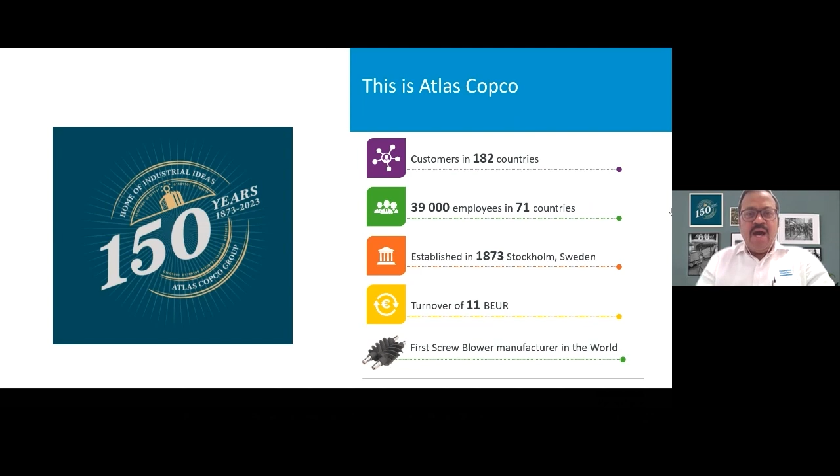And we are also the first company in the world to bring out the screw technology in blowers. And in India, we have been present for more than 60 years. We have a couple of plants manufacturing compressors and blowers. We have been doing that since the 1960s.

Mr. Saurabh, just a minute. Yes. Can someone from the group let me know, is there an echo in the sound? If it's sounding okay, just put your comment in the chat box. Is my voice echoing or are the slides having a lag, something like that? No, there's a sound echo. Just a minute. Okay. Okay, we'll proceed. Thank you.

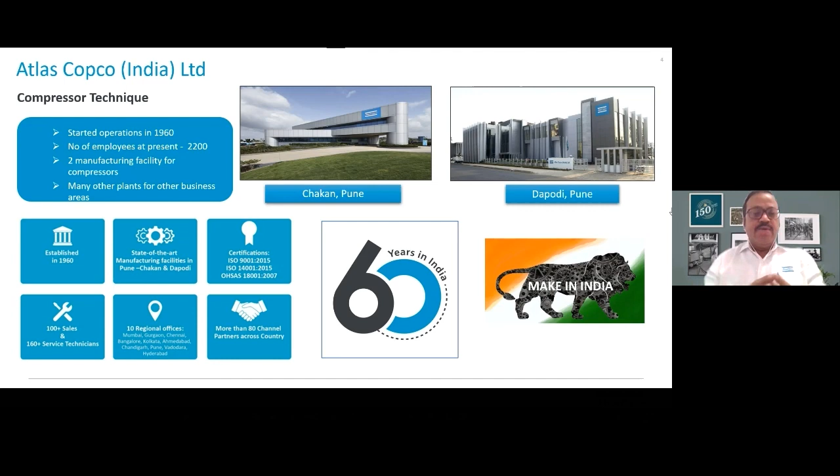So without wasting any further time, let's get into the subject. Wastewater treatment is now, as Veronica mentioned, a point of a lot of concern. It's no longer a good-to-have. It's a must-have for each and every plant, each and every business. With increasingly stringent pollution norms coming in, it's more imperative that we treat the water properly. And treating the water calls for a long process, and in some cases it goes to a 3 or even 4 stage process, wherein you have a primary treatment and then a secondary treatment.

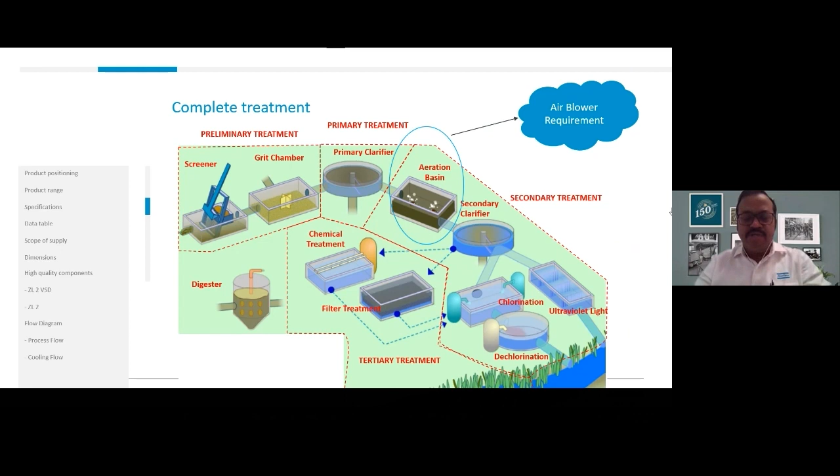In most of the processes, what is common is that it's an aerobic process. That means it needs oxygen for the treatment. And it's quite common that we have an aeration basin. And there the most critical part of the entire ETP, or wastewater treatment plant, the aeration blowers, comes into play. This is where we want to bring the focus of our discussion this morning, to understand what are the things which define this blower.

Typically, the application of the blowers is to create oxygenation in the water. Depending upon the quantity of water, the amount of dissolved oxygen required, and the amount of BOD and COD finally required, the amount of oxygen, and based on that the amount of air, is decided. And the height of the water column or liquid column of the tank defines the back resistance or the pressure, plus whatever resistance the pipeline adds to that.

Now there are certain very interesting theories. Maybe you are very aware of them. The longer the liquid column height, the better the oxygen transfer efficiency. What we mean by oxygen transfer efficiency is that the more time the air bubble takes to reach the surface from the bottom of the tank, the better the oxygen transfer efficiency.

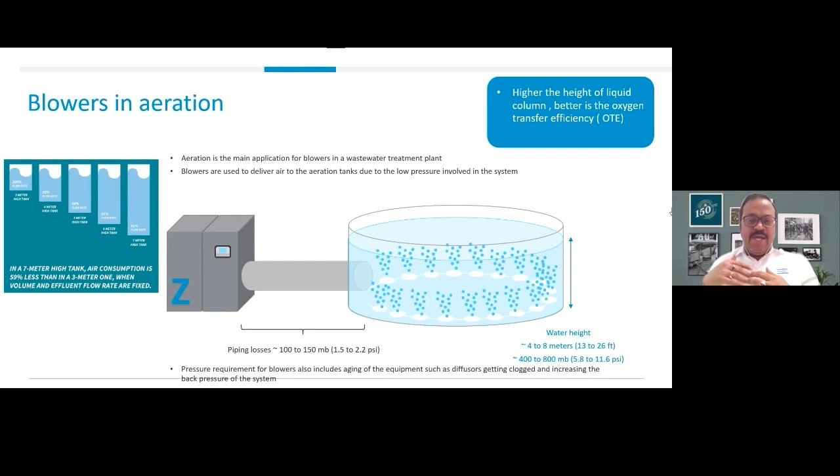It has also been a matter of research and development, and it has been proven, that if the height of the water column is higher, the amount of oxygen required is much less, because the transfer is happening at a much better rate. It gets enhanced. So what we mean to say is that there is a theory here.

If it's a 7-meter high tank as compared to a 3-meter high tank, the final volume required will be almost 59% less than the 3-meter one, provided the same quantity or quality of effluent is coming in. So that's also a matter of great understanding, so that we understand the volume and the pressure required for the aeration purpose.

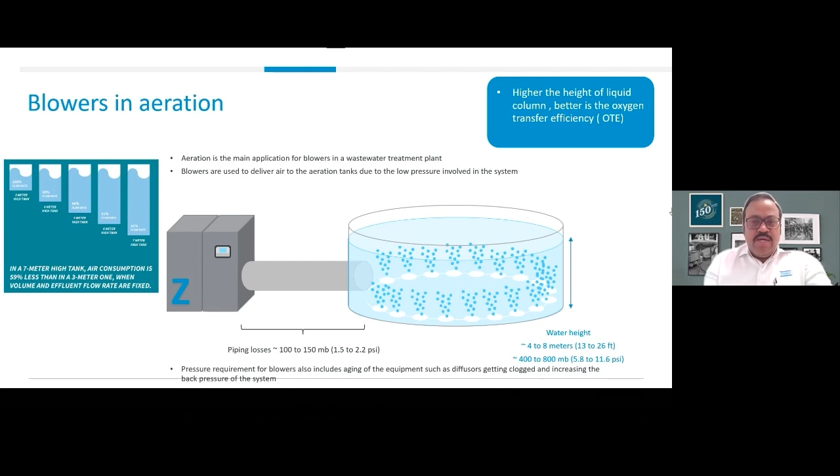So having understood that, let's proceed to understand why it is critical to understand the blowers and what it leads to. Typically in an industrial environment, what we have seen is that the demand for air is varying in nature. It's never fixed, depending upon the quantity and quality of effluents coming in during certain parts of the day. Maybe in the day shift it is higher than the night shifts. And even in some months production may be higher than others, it can be seasonal, so it is varying in nature.

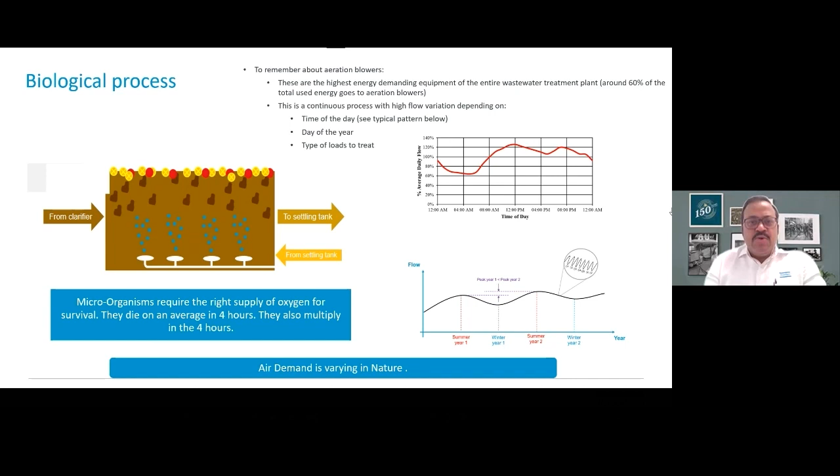So the air demand is varied, and we need to align the blowers according to the demand to give the best results. We have done several audits in many of these wastewater plants, and what comes out as a common theme after all these measurements is that the aeration blowers play a critical role in the overall energy mapping of the ETP plant.

We can say with a lot of confidence and responsibility, based on the audit reports, that almost 55 to 60% of the energy of an ETP plant is on the aeration blowers. That is a very high value. Let's say a typical ETP plant in a chemical or pharma plant with a standard size ETP: if the monthly bill is around 2 crores per month, then almost 1.2 crores is the contribution from the blowers. So it's very high power consuming equipment, because it runs 24/7.

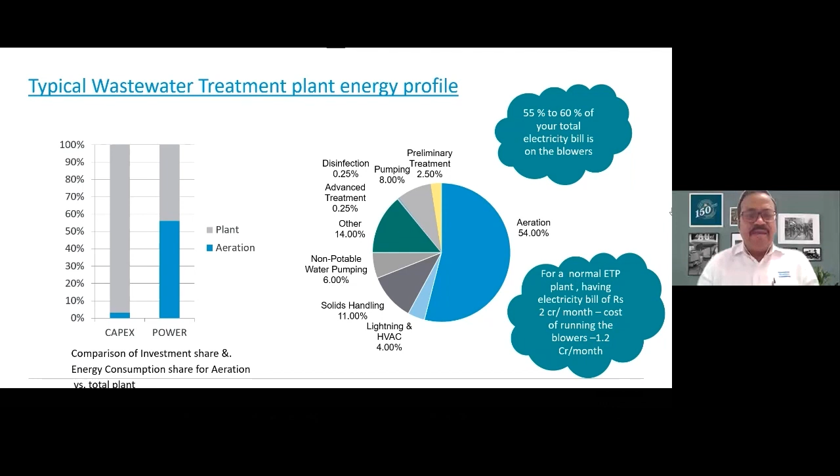The blowers cannot be stopped. It's process equipment, so the efficiency and reliability of these blowers becomes very important. The discussion we are going to have is how we can add value to this process: first by measurement, and once we measure, we can further improve it. That's the main basis of our discussion, that the air blowers consume almost 55 to 60% of the energy bill, and how we can reduce this so that we have an enhancement in operational efficiency.

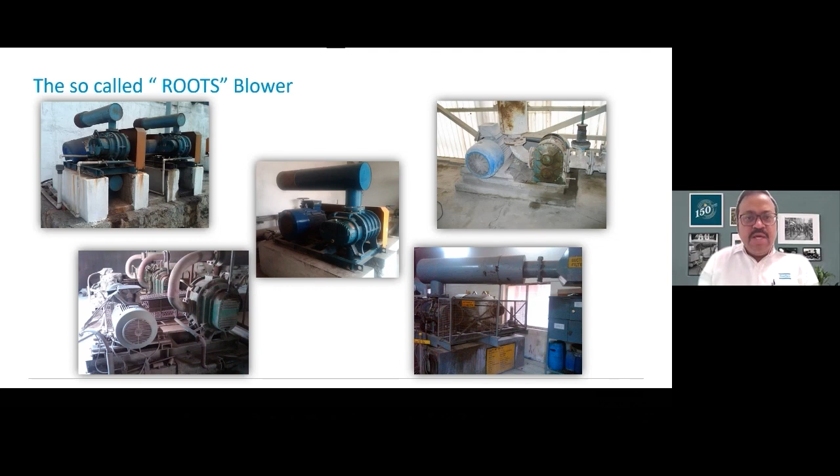If you see the different possible technologies, broadly they can be classified as positive displacement blowers and dynamic blowers. Positive displacement blowers are those wherein the volume is reduced to increase pressure. Typically these are available from 0.3 to 1.5 bar. Dynamic blowers are those wherein the kinetic energy of the air is converted to pressure head, available from 0.2 to 2 bar. That's how the blower technologies are available.

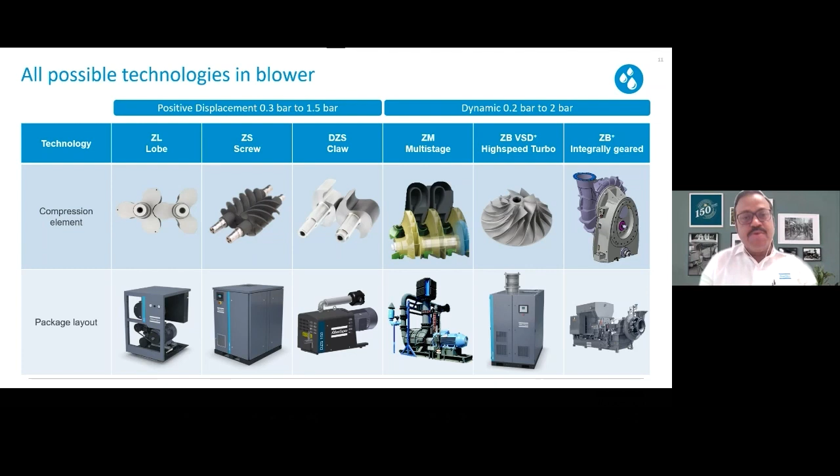Right now we are going to discuss primarily positive displacement, which we find very common in most water treatment plants. These are the two different possible technologies that we are going to discuss today. So let's start with the tri-lobe.

Now, Veronica, just confirm whether the video is visible. Is the animation visible?

Yes, it's visible. Okay, thanks.

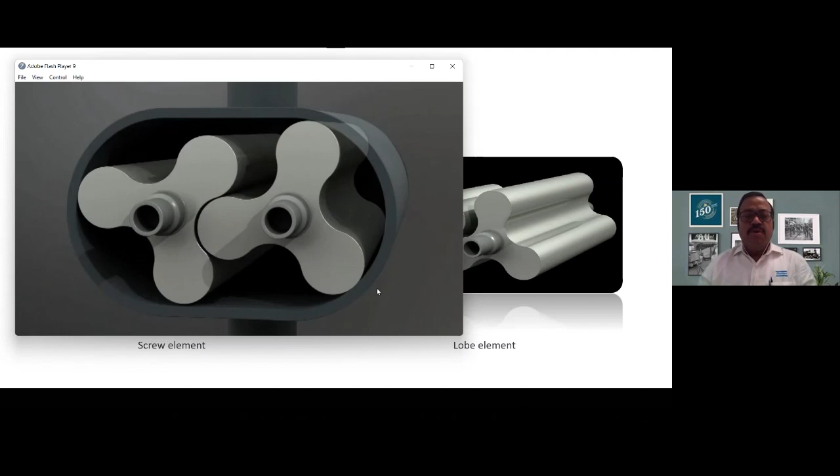Now here, this is an animated view to show how our tri-lobe blower operates. So a tri-lobe blower is basically a displacement device. It has an inlet port at the top, which you can see in the green portion, and it has a delivery port at the bottom. It's basically displacing a certain amount of air. Now, since at the discharge end there is an application, like here in this case a water column attached to it, there is a back resistance.

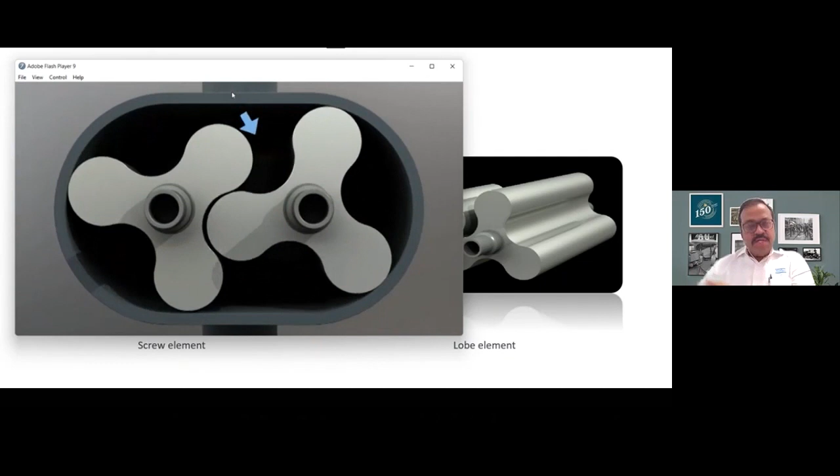Because of that back resistance, the air gets trapped at the delivery end, which is the blue portion, if you can see here. That creates an external kind of pressure. So there is no internal pressure being developed along the length of the profile of the lobes. It's basically an external pressure. So if you remove the external resistance, it will develop no pressure. It's just a displacement device from the suction port to the discharge port.

So since the entire pressure is coming up at the discharge port, you'll find a lot of vibrations and noise coming from the discharge port for these kinds of blowers. So this technology is called external compression technology, wherein the entire pressure is developed at the discharge end. This is very commonly used because it's very easy to manufacture. It does not require much expertise, but a common problem with these blowers is that since it's an external compression device, the energy consumption is pretty high for the same flow and pressure.

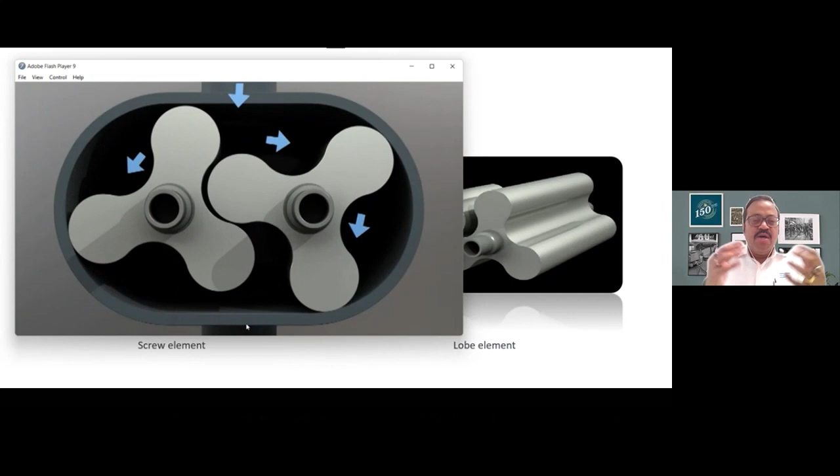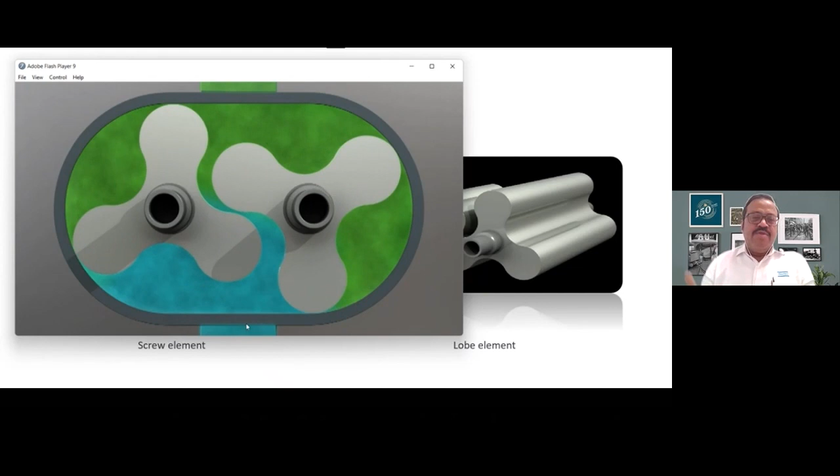And also because of this technology, air always has a tendency to go from the high pressure to the low pressure end. So there is always a tendency of the air to flow back from the blue portion to the green portion. We call that leak back. So whatever inlet volume of the machine has been defined, you'll never get that delivered. There will always be a deviation. And with time, the lobes also wear out, so the volumetric efficiency also drops. So that's on this technology.

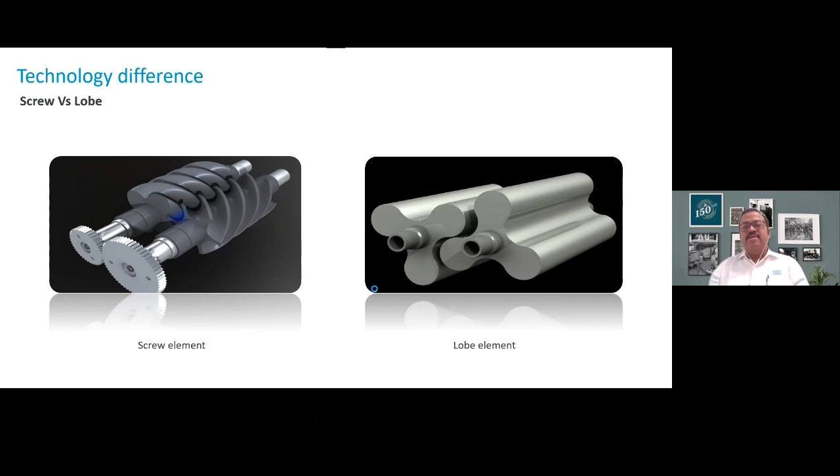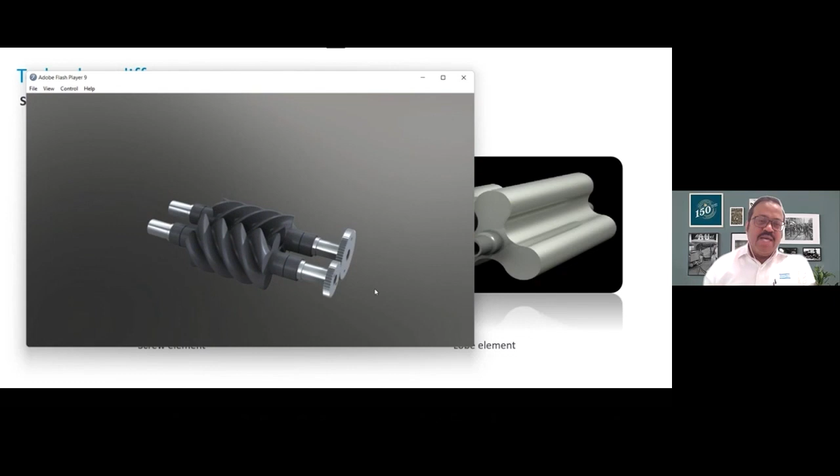Whereas if you look at the screw technology, the other technology available in the market, it's a different technology where we are talking about internal compression. Now, what's internal compression? Along the length of the screws, between the inlet and the outlet port, the volume is progressively diminished to have a rise in pressure. So here the compression is internal, it's mostly adiabatic, and that's what gives us the better efficiency.

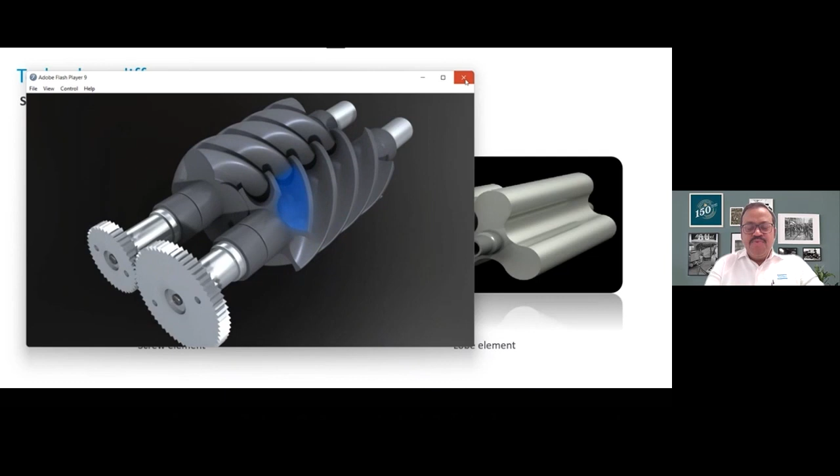And as you can see here very closely, although the screws seem to be touching each other, they are actually not. There is a very minor clearance or gap kept, and they are driven by the gears which you can see here. The timing gears are driving the male and the female rotors. As a result, there is no wear and tear happening in between, and the air is internally compressed. So what happens with this? Let's have a closer look.

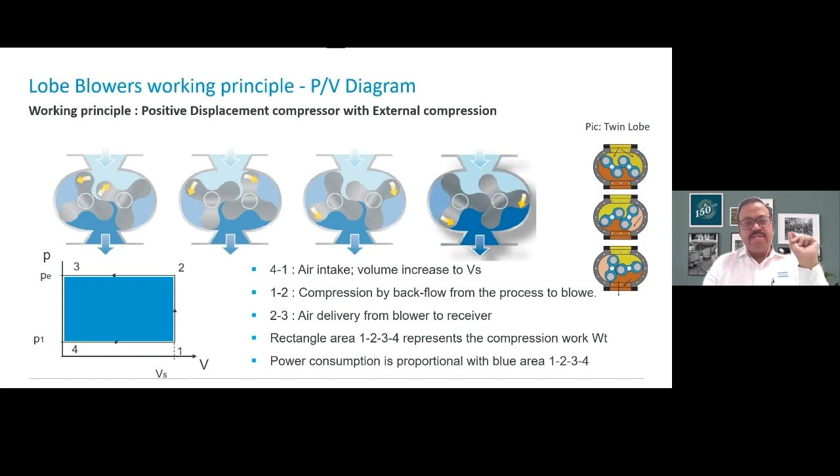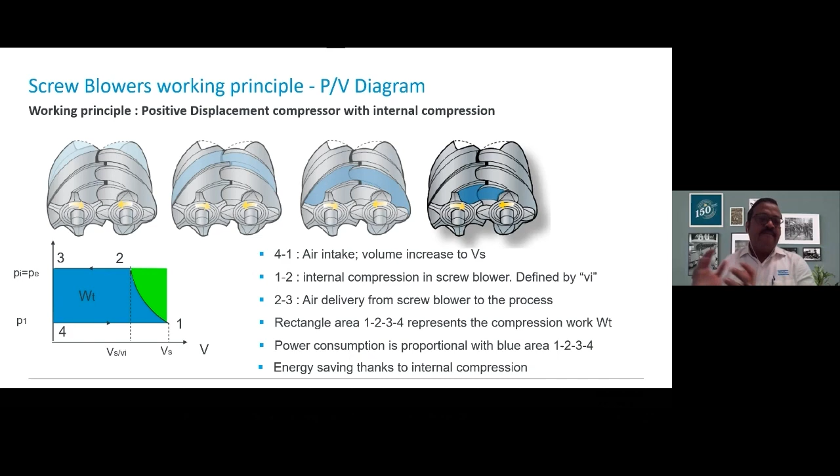We all know the area under the PV diagram for any machine is the work done. So this is typically the thermodynamics of the tri-lobe blower, where the area under the PV diagram represents the work done. Similarly, for a screw blower, the suction is almost the same, whereas the compression is more adiabatic, and the green portion you see here is the difference in the work done, or the power savings that we have.

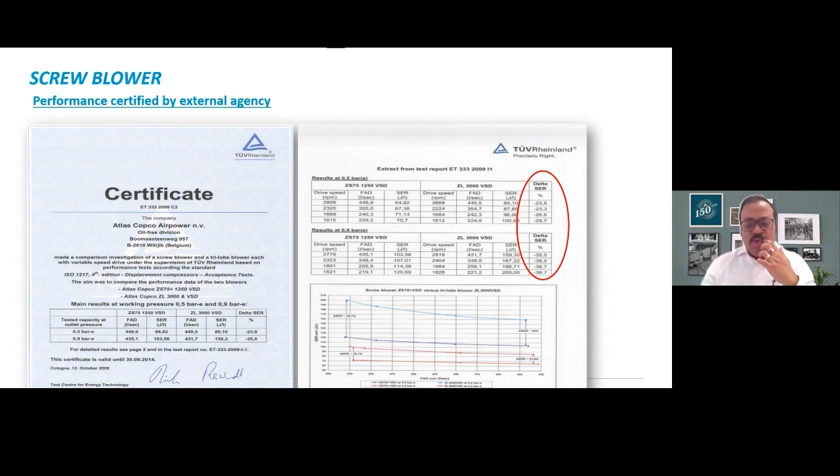Okay. So we manufacture both these kinds of blowers, and we had a head-to-head test of our own make lobe blowers and our own make screw blowers in the presence of a very renowned certifying agency called TUV. Both kinds of blowers were tested at different pressures with the same flows by means of a VFD. So let me show you the results more closely. At different pressures these were tested.

So at 0.5 bar and 0.9 bar, ZS means the screw blowers and ZL means the lobe blower, just for you to understand. The results that came out for all these repetitive tests are that at 0.5 bar, a screw blower is almost 24 to 30% more efficient than a lobe blower. And when the pressure goes up, the difference further increases.

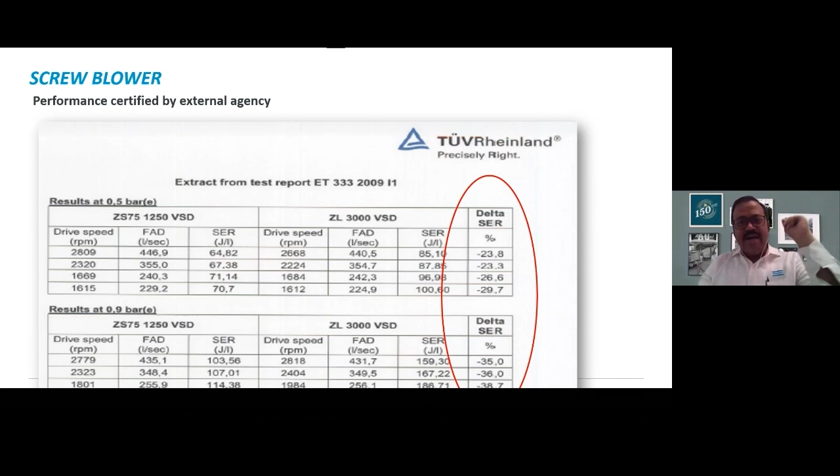So let's say at 0.9 bar, the difference will be as high as 35 to 40%, which is a substantial difference. So let's say we are talking about a 0.9 bar application for a lobe blower. If you replace that with a screw blower, what you can immediately expect is something like 35 to 40% savings on your energy bill.

So we also had a thing on the VFD part of it. We knew based on all our measurements that the air demand is varying in nature. It's never fixed. And we have seen that most installations are with VFD, but the control is not happening in a closed loop. What is happening? The VSD is being manually controlled, and as a result, either more air or less air is being delivered. It is never accurately being measured, and there is no flow feedback control loop there.

So what we can do very easily with this kind of blowers is accurately control the dissolved oxygen required in the water by means of a very simple arrangement which we are showing here. Let's assume that this is the tank where your effluent treatment is being handled, and you have a certain desired DO to be maintained. By means of a very simple PLC, you can program the desired set point, and the DO sensor has to just give an analog output in the form of 4 to 20 milliamps. Then that signal can be directly hooked up to the VFD, and the VFD can give you the exact amount of air required to maintain the DO at that instant of time.

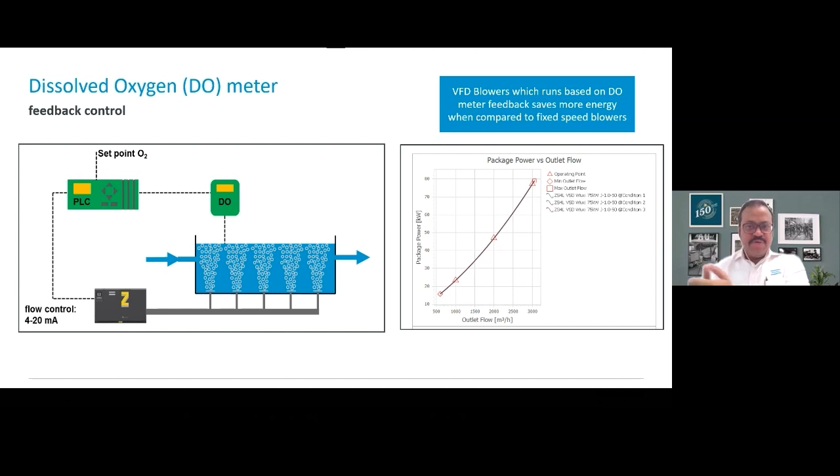So what advantage will you get? Let's say you have taken a blower which has got a huge turndown, more than 70%. By turndown I mean the minimum flow to the maximum flow. Now if you can actually meter it, let's say you get a signal wherein you need to only deliver 1,000 meter cube, then your power consumption, as the curve suggests, will only be proportional to 1,000 meter cube. And if it's giving a signal to run at 2,000 meter cube, then the power consumption proportionally increases.

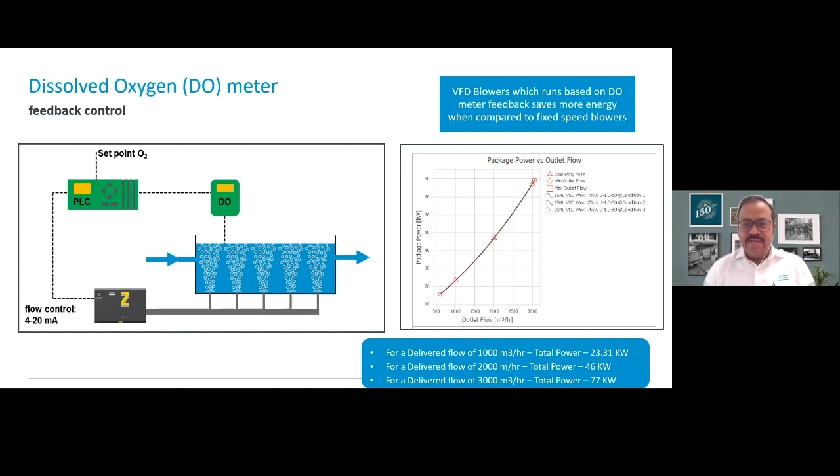So that will give you a very accurate measurement of DO, and also the power consumption substantially comes down, and there is no manual intervention here. It's a completely automatic closed loop control of how the VFD is going to operate. I'm just giving you a perspective. Let's say there is a demand of varying nature from 1,000 to 3,000 meter cube. This is how a VFD can actually work wonders for this kind of application, an integrated solution like this.

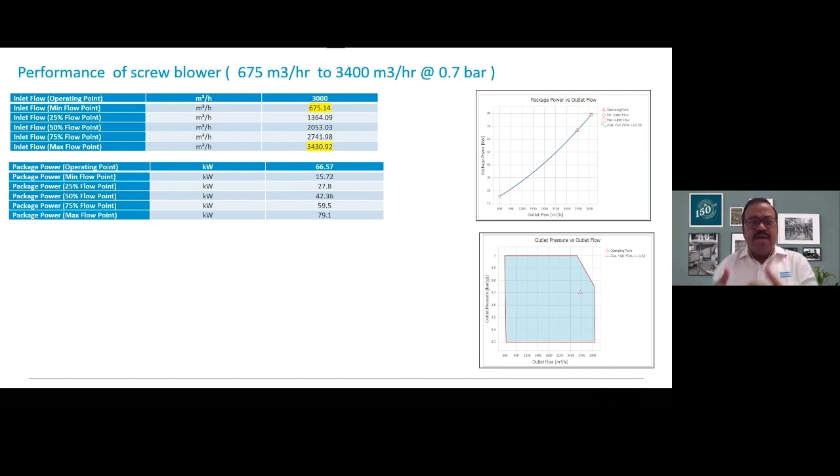Okay. So let's get into one of the practical examples. Let's say we have a situation with a very varying demand, from 675 to 3,400, and typically a demand of 3,000 meter cube. When we audited the existing installation, it is with a 110 kilowatt tri-lobe blower. We are contemplating possible solutions. We can achieve 675 to 3,400 at 0.7 with a 75 kilowatt blower, wherein the total package power of the blower can be around 66 kilowatt. When we measured the existing blower from the existing installation, it came around 96 kilowatt.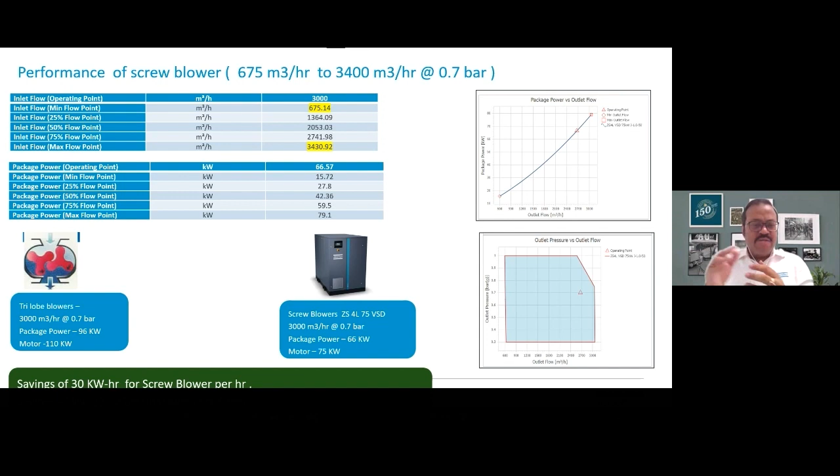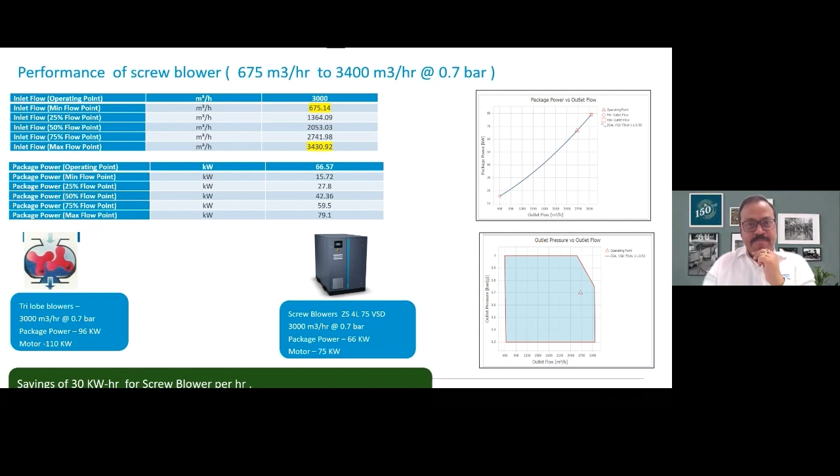The difference straight away comes out around 30 kilowatts. And as I told you, it's a continuous duty blower. It cannot stop. So if you put the mathematics correctly, you have straight away savings of more than 22 lakhs per annum on the operational cost. That's the kind of efficiency and operational flexibility it brings you, with such a huge turndown. And again, this can be controlled in a direct loop with the VFD, as we have shown in the earlier slide.

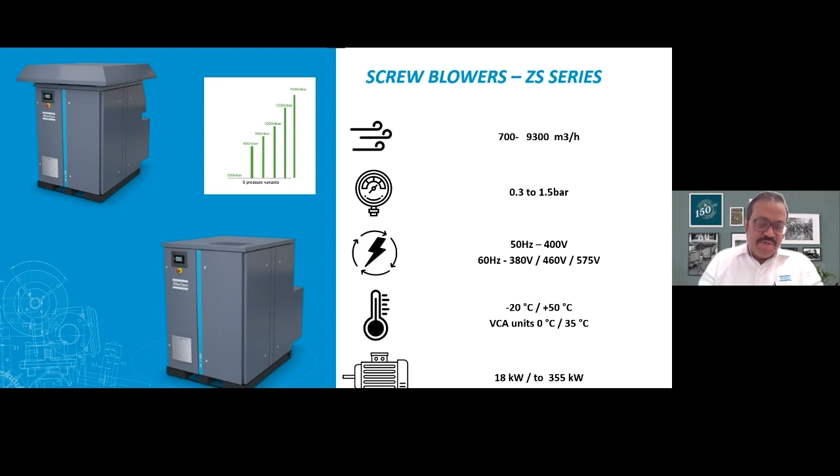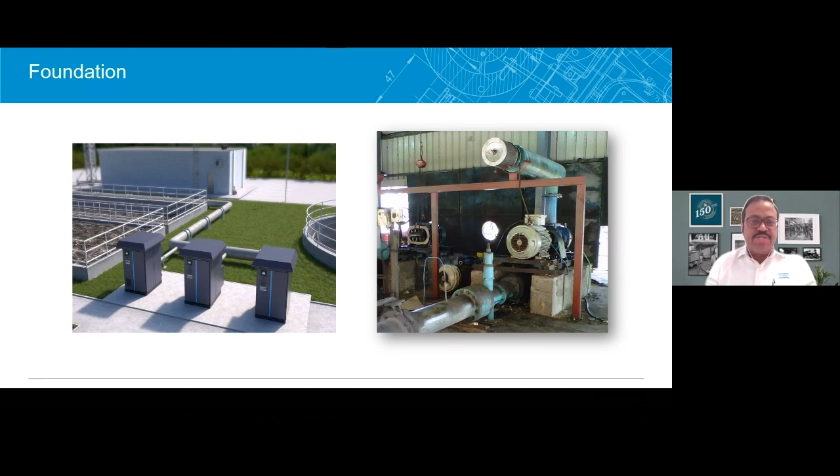Okay, now these are available in various pressure variants from 0.3 to 1.5 bar, and come from as low as 18 kilowatt to around 355 kilowatt. It also has a very wide range of flows, from as low as 700 meter cube to as high as 9,300. Okay, so on foundations, it can be just placed at the application end. You need not have very heavy foundations. So most of the civil work, even a room, is actually not required.

I'll show you a few of our existing installations wherein these blowers are actually placed with a rain protection canopy so that the rainwater does not go inside. And this is absolutely a fine installation, so that you can save on your civil cost also in making a room. It gives a very wide turndown of 70%. All the blowers are air cooled, even for the 1.5 bar variant. So there is no need for any additional utility or water to be provided.

We have shown that the VFD works perfectly fine with the 4 to 20 milliamps from the DO sensor and can be hooked up. And this also comes with a very silent operation with canopies and all. So the actual noise will be less than 78 decibels.

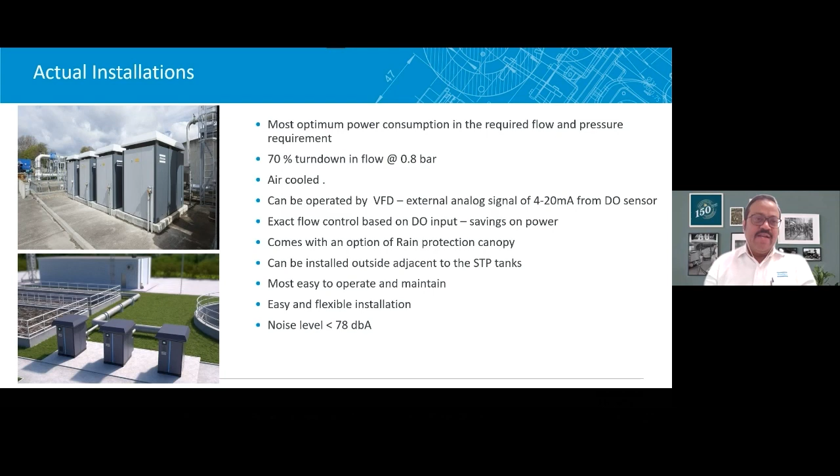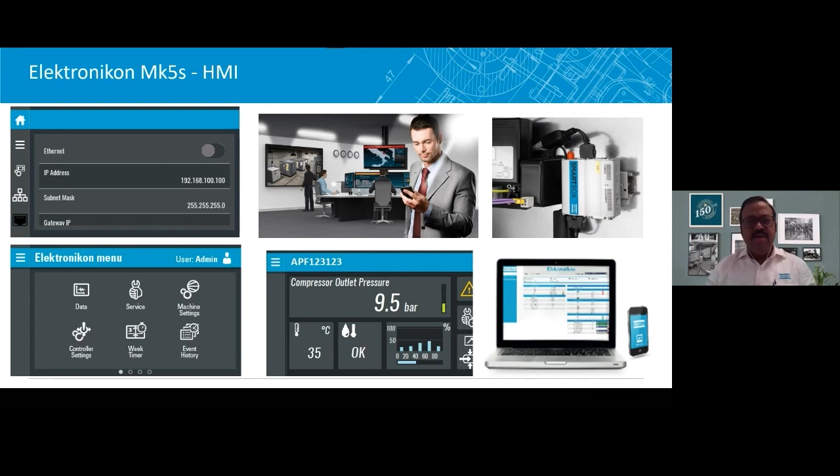This also comes with a very enhanced microprocessor-based control, which will give you all the possible outputs, and it will also give you all possible connectivities, whatever you can think of. You can directly take that data to your laptop or even to your mobile, and it can give you triggers or alarms when the blower needs a bit of service, when service interventions are required. Now, this is something which will give you additional flexibility and peace of mind while in operations.

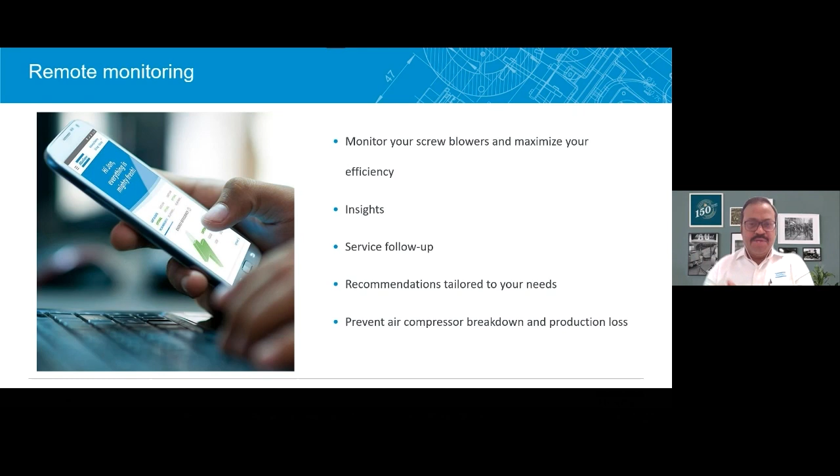So just to summarize whatever we discussed today: in any ETP plant, aeration blowers are of extreme importance. Why? Because these run 24/7, and almost 60% of the electricity bill comes from aeration. So it is most imperative that we give some attention and focus on the power consumption of this. If you can reduce like 30% of the power, that can actually translate to a lot of operational savings.

If the operating pressure is somewhere around 0.5, 0.6 bar, you can be very sure that you get 30% saving. If the operating pressure is higher, if you have a higher liquid column, then on one side it will have better oxygen transfer efficiency, and if you're replacing with a screw blower, the power savings can be as high as 40%.

With a VFD control, with a DO meter, actual closed loop feedback can be set, which will further enhance the accurate controlling of the DO, so that there is no excess air or less air being supplied. The actual quantity can be supplied, which will further proportionally reduce the consumption, and the efficiency of the operational plant can be increased.

And these blowers come with 70% turndown. So one blower can give you a very wide turndown. It can be installed just close to the application area where your ETP tanks are, it can reduce the noise, and it has got much better control and monitoring with all IoT based control, which is possible.

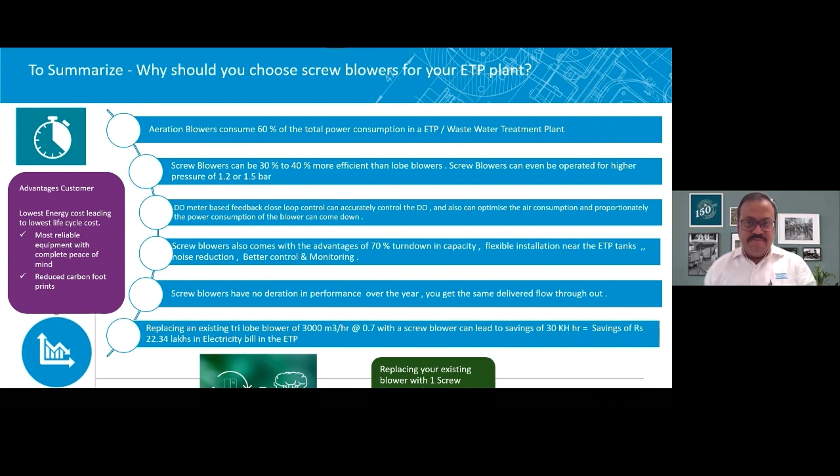So these are a few things that you can consider if you have an existing plant with some existing tri-lobe or twin-lobe blowers. The first step we will always recommend is to go for an actual measurement, a kind of an audit. And once we understand that, then we can propose it, and you can have fantastic savings in your operational cost on the overall ETP.